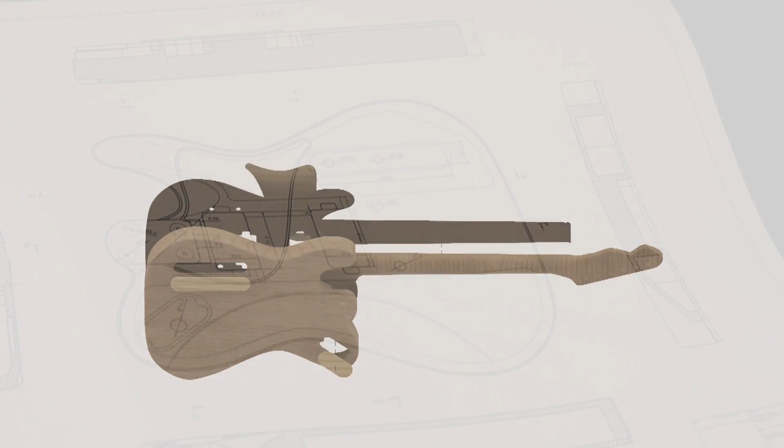So here at CPS we specialize in milling, turning, welding of stainless steel, aluminium, and various different materials. We do router work as well. So when we heard of this project for the guitar, we went like, yes, this is a great opportunity for us to prove ourselves, especially on the router work.

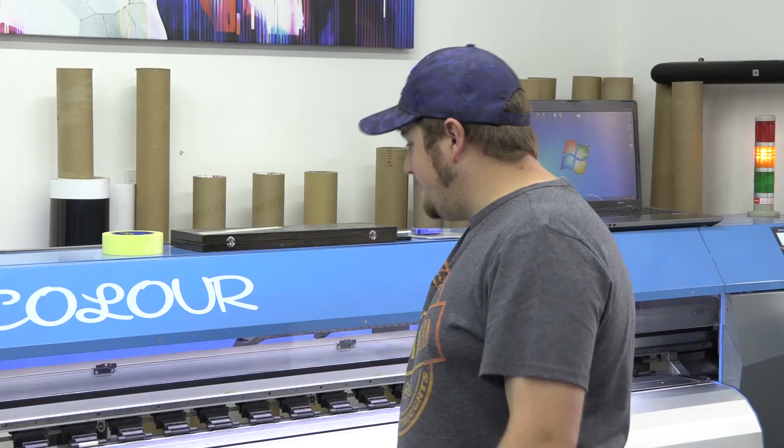So we've been working way too hard around here. It's about time we do some chill time. It's paintball time.

We're going to create some really cool goodies for this, make it look really cool. Set some ground rules and then shoot the crap out of each other.

But for now, it's time for Riley to get cracking on the ice freezer project. As for the design, I took the elements of their logo and all their branding and moved it according to the fridge and how it was going to be presented when you walked up to it, as if you were going to pull an ice bag out of this freezer.

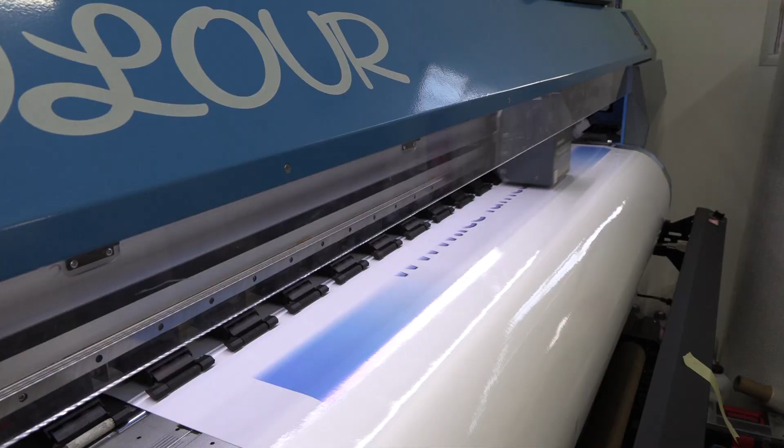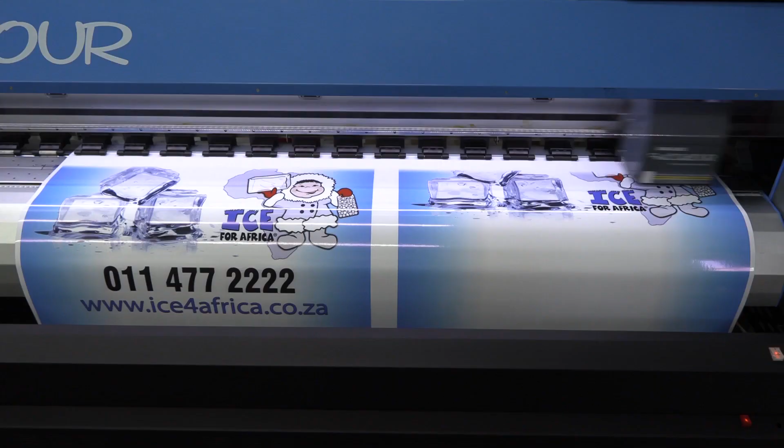Then for what I used on top of it, for branding, I used a greyback adhesive to make sure I block out any blemishes that are on the freezer already, because it is quite old and blemished. Then from there we use lamination on top just to make sure that it can stay extra protected and last as long as it can.

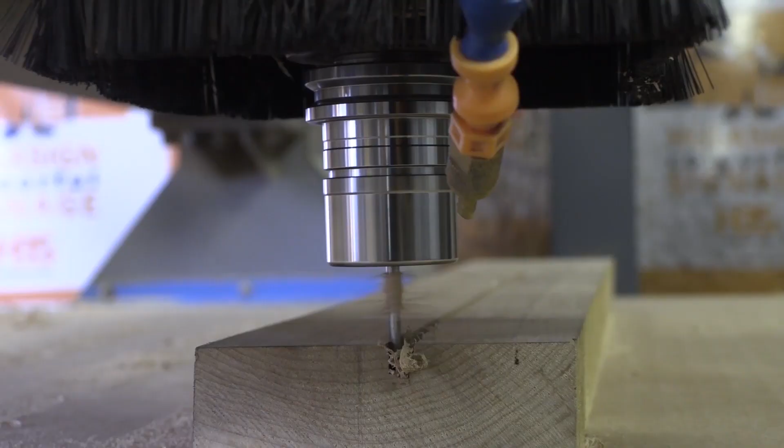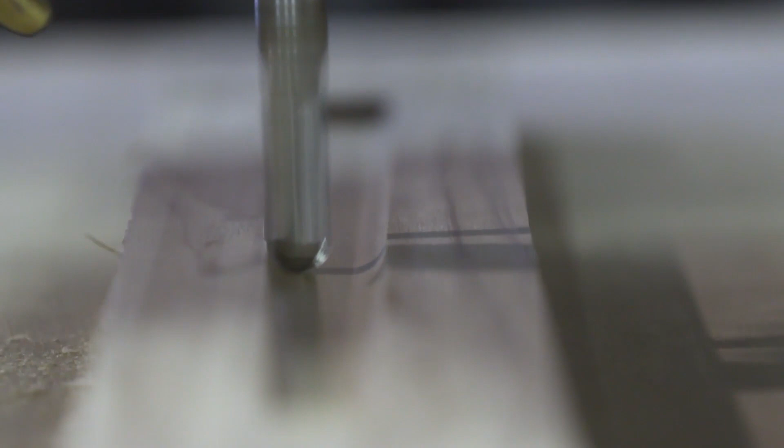Six-string guitar making dates back to the 18th century. Of course, in those days, everything was handmade, and it was no easy task. But in today's world, the CNC machine has made it that much easier to accomplish, like the convex contour at the back of the guitar's neck that fluctuates in size from top to bottom, which can now be achieved in one smooth motion.

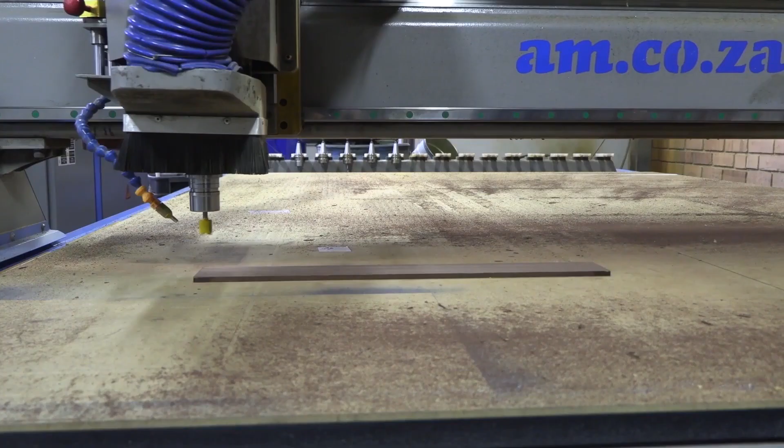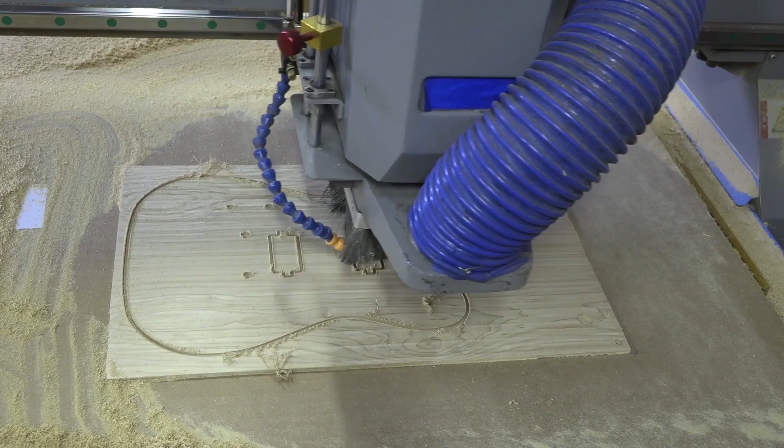Which now begs the question, can it still be said that this guitar is handmade? Why I think this guitar project still falls under handwork is because we basically took everything they used to do back in the day and just modernized it with machinery. There is still handwork on there, and from there we basically just changed the tools. In this case we use a CNC machine from AM.CO.ZA, because this machine gives us the consistent precision that we are looking for.

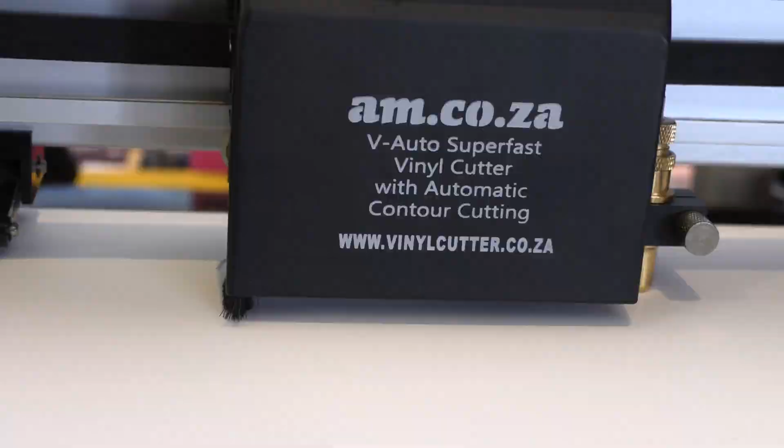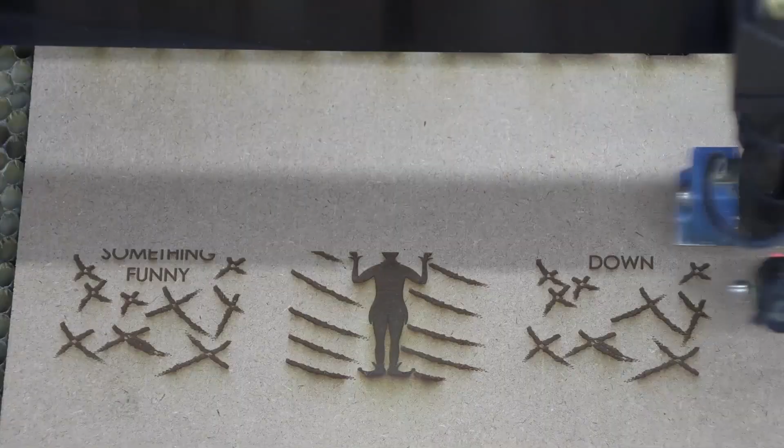Meanwhile, on the other side of town, the paintball project gets underway. For the t-shirts, I'm going to use a 180 gram shirt, nice and thick, so that when we're running through the bush and playing paintball, it's not going to get ripped up from being shot and heavily abused. I chose to do something different, and I introduced the wild cards.

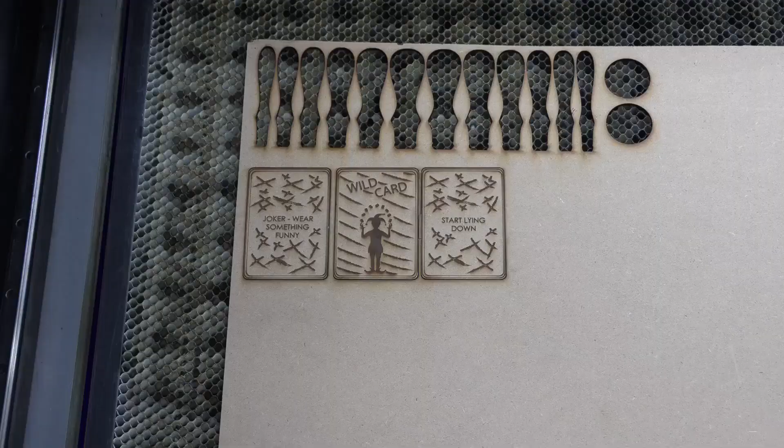These wild cards, each player has to pick a card. The card that they choose is their punishment for that round. They have to play the paintball game using that card and whatever the rule is for that card, just to make it a bit more interesting than your normal game of paintball.

I chose to make it out of wood MDF from the laser machine, simply because it's going to last a bit longer than doing laminated paper.

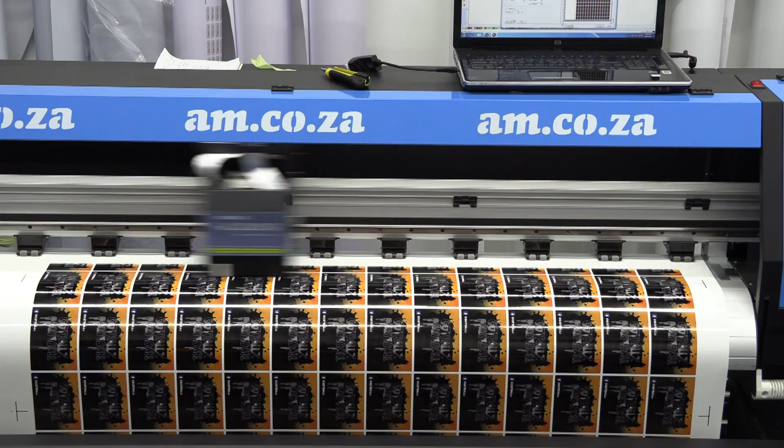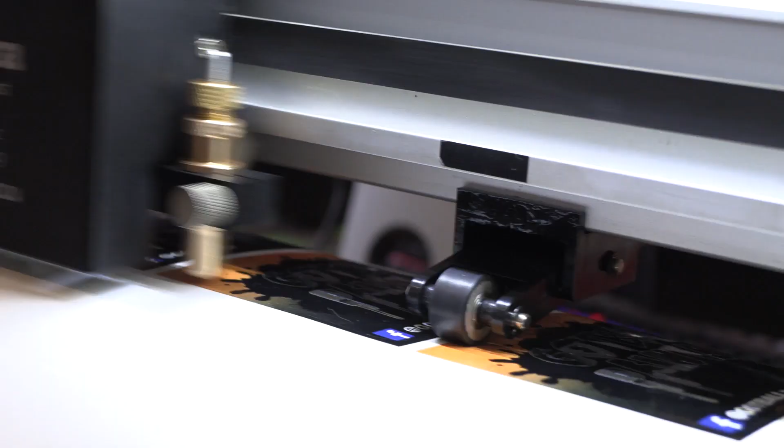The reason why we did the stickers was just for the people to hand them out, have them, it's for free, just to get the word out about what we're doing here, creating a different type of paintball, a wild card event.

Things are looking good here. Can't wait to see this in action. But first, let's see how the ice freezer project panned out.

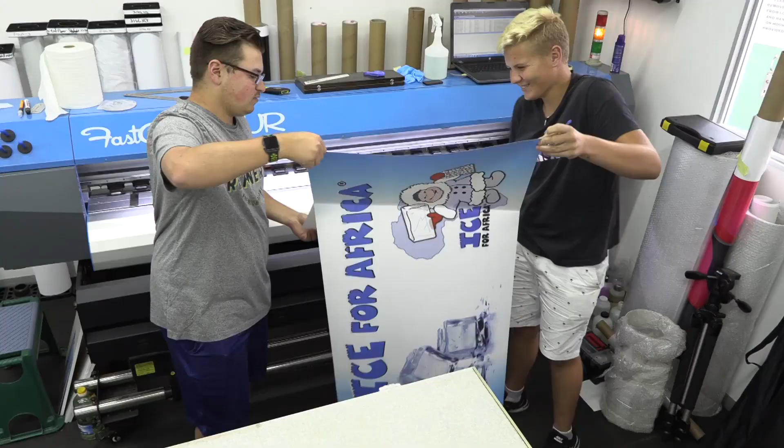And I think we came up with quite a nice product today. I think from taking this freezer that looked really bad to looking very new, making sure that we represent Ice for Africa's brand identity. And I think Ice for Africa are going to really like this one.